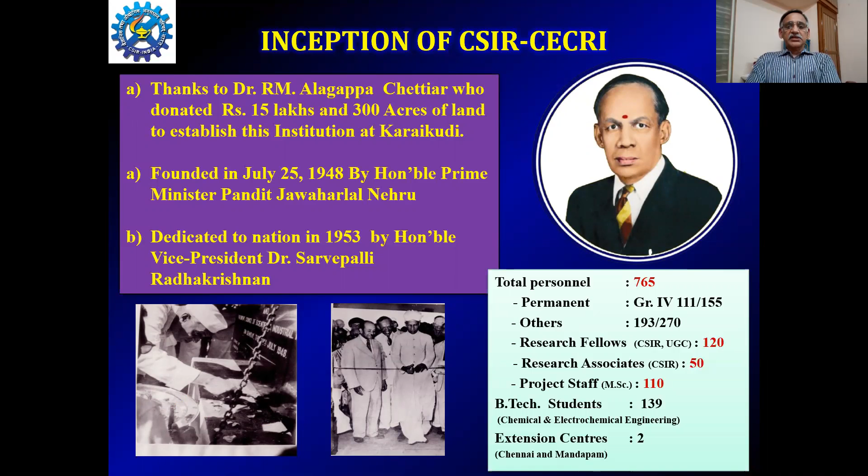CECRI also has a BTech program, unique of its nature called BTech in Chemical and Electrochemical Engineering, affiliated to Anna University, Chennai. And it has two extension centers, one at Mandapam, another at Chennai.

Devoted fully for electrochemical science and technology, CECRI has various core strengths: corrosion and material protection, electrochemical power systems, electrodics, electrocatalysis and bioelectrochemistry, electroplating and metal finishing, electroorganic and material electrochemistry, electrochemical process engineering.

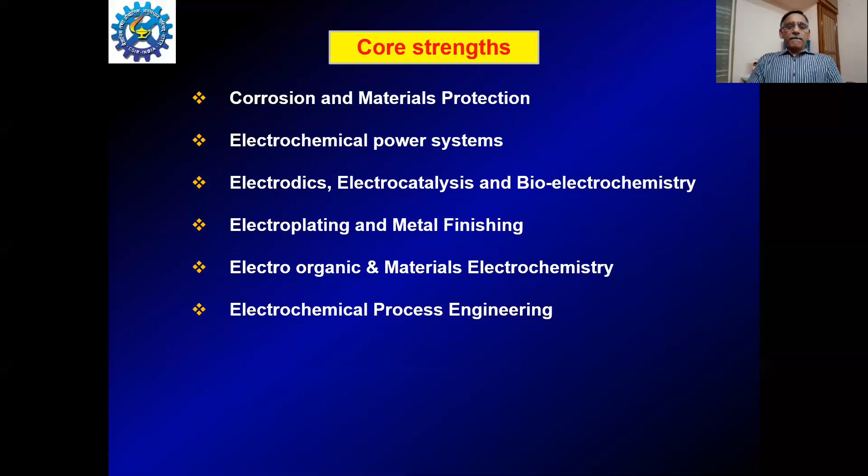Coming to the subject, corrosion and its control. What is corrosion? Why is it so important? Let me start my talk with the book definition of corrosion. Corrosion can be defined as the degradation of material due to its reaction with its environment.

This degradation may be the reduction in the useful properties of the material, or the weakening of the material due to thinning, and so on and so forth.

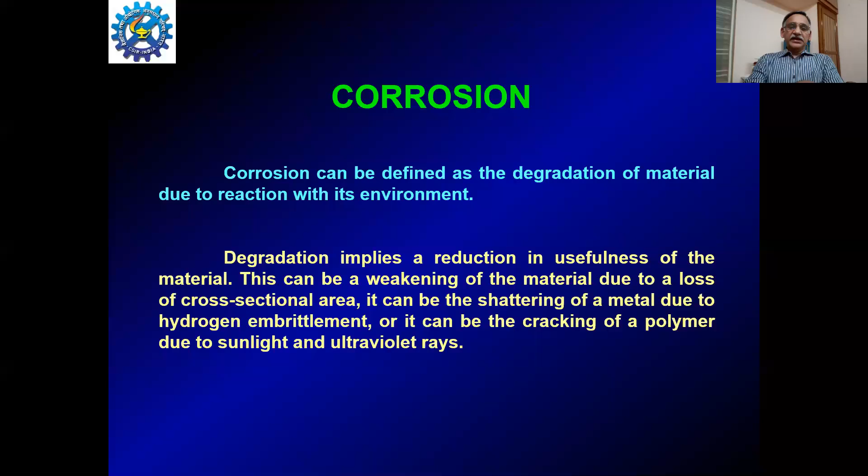Corrosion causes huge economic loss, not only to industries but also to households. For a nation, whether it is developed or under development, it amounts to around 3 to 5% of its GDP towards corrosion and its mitigation.

There are various losses which make corrosion so significant. It can be classified into two categories: direct losses and indirect losses. For example, the cost of materials lost due to corrosion comes under direct loss. The cost due to coatings and their application to mitigate corrosion comes under direct loss, and the use of corrosion inhibitors, or the cost of corrosion inhibitors, also comes under direct losses.

There are other indirect losses also. For example, if a company or an industry is forced to shut down due to a corrosion problem, then the production time lost and the product lost is also an indirect loss. Loss of product, probably leakage of some petroleum products, etc. in the petroleum industry, loss of efficiency.

For example, the loss of heat transfer efficiency of heat exchangers due to corrosion, contamination of food product. For example, if it is a food material manufacturing industry, such as infant foods and all, where the existence of corrosion at one point or another may also contaminate the product and it will become non-saleable.

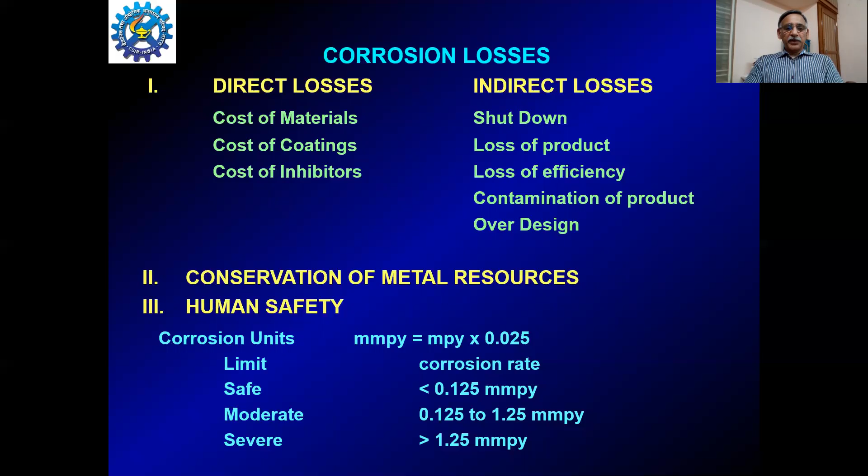Let me go into the little chemistry part of corrosion. For example, take magnesium metal. When magnesium is exposed to atmosphere or when it is immersed in water, it will have a reaction like this: Magnesium plus water plus oxygen gives magnesium hydroxide.

The delta G, that gives free energy for this reaction, is minus 1,42,600 calories. Take the example of gold. If a similar piece of gold is placed in water or kept in atmosphere, gold plus water molecule plus oxygen gives this hydroxide. The Gibbs free energy for this reaction is delta G is plus 15,700 calories.

Higher negative value of Gibbs free energy predicts that this reaction is more spontaneous, whereas the high positive value of this reaction says that it is not at all spontaneous.

So among the metals, there are some metals which can immediately react to the environment, and they are called active materials as far as corrosion is concerned. There are some metals like gold which will not react spontaneously with the environment, leading to corrosion, and hence they are called noble metals. Where from these metals are obtained?

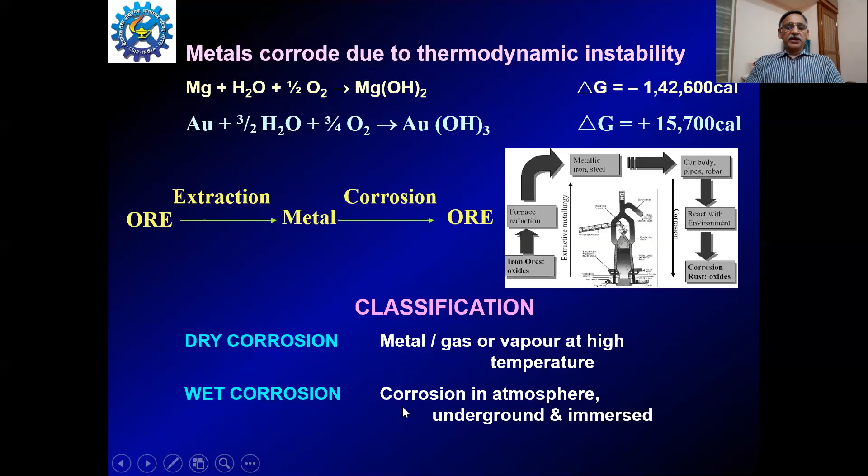We normally come across this wet corrosion, and we are going to see the chemistry part of wet corrosion in the coming slides. Let me take the example of zinc, which is a highly active material.

Zinc dissolves with hydrogen evolution. All chemistry students or chemistry faculties know this. When a piece of zinc is put in hydrochloric acid, in a beaker of hydrochloric acid, this is a reaction which will occur.

Zinc plus hydrochloric acid gives zinc chloride plus hydrogen. One atom of zinc metal reacts with two molecules of hydrogen chloride to form one molecule of zinc chloride plus one molecule of hydrogen gas. This is very spontaneous. Immediately when you put zinc into the hydrochloric acid beaker, this reaction will take place.

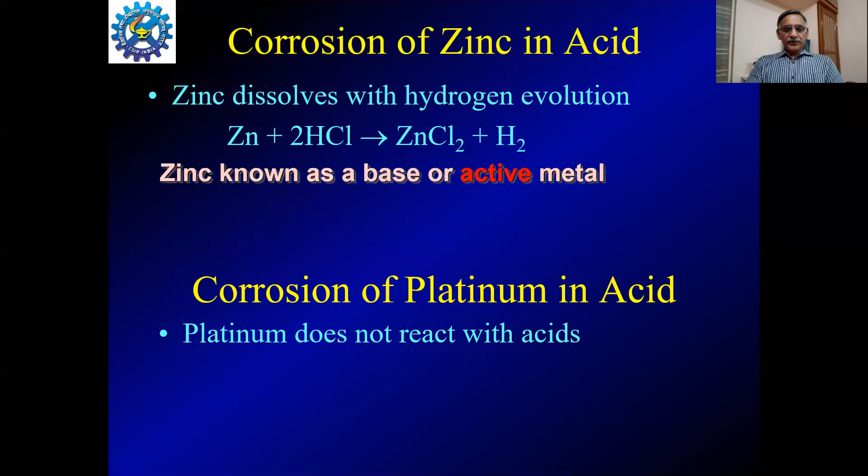So zinc is known as a base or active metal, as I already mentioned. Take the example of platinum. If you put platinum in the same acid, it does not react with the acid. And hence, as I already mentioned, platinum, like gold, will also come under the category of noble metal.

Let me explain the reactions involved in this process using a small cartoon. Take a small rod of zinc, and this is a small beaker containing hydrochloric acid. Immediately when you put zinc into it, we will have zinc dissolution and a lot of gas bubbles, this pink colored one, or hydrogen evolution that occurs on the surface of zinc.

Similarly, if you put a similar rod of platinum in the same hydrochloric acid beaker, nothing will happen because it is a noble metal. Here I have an ammeter just to indicate the current flow, and here the switch is open. So the reactions occur only on the zinc surface. We have zinc metal dissolution and also a vigorous gas evolution from the surface of zinc.

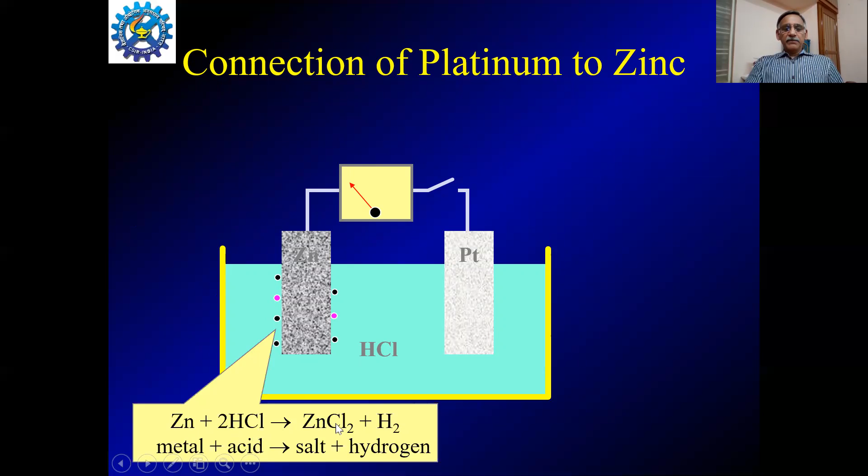Zinc and platinum are not connected, so there is no reaction on platinum. Now, the reaction, as I already introduced, zinc plus 2HCl gives zinc chloride plus hydrogen gas. Now I am connecting this switch.

Now the switch is connected, so the zinc is electrically connected to the platinum. What happens here? The zinc metal dissolution occurs on the zinc surface. You can see all the pink dots got transferred to the platinum surface because there is an electrical connectivity between these.

Notice that here the current also flows. When the switch is open, there is no flow of current. When the switch is connected, there is a flow of current. Zinc and platinum connected, current flows, and hydrogen is evolved on platinum. Here you can see only black dots, that is the metal dissolution on zinc surface, and the pink dots, that is the hydrogen gas evolution on the platinum surface.

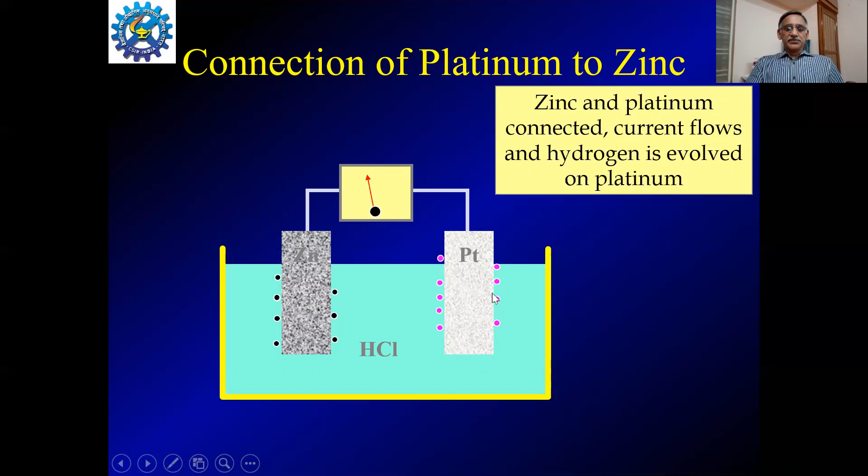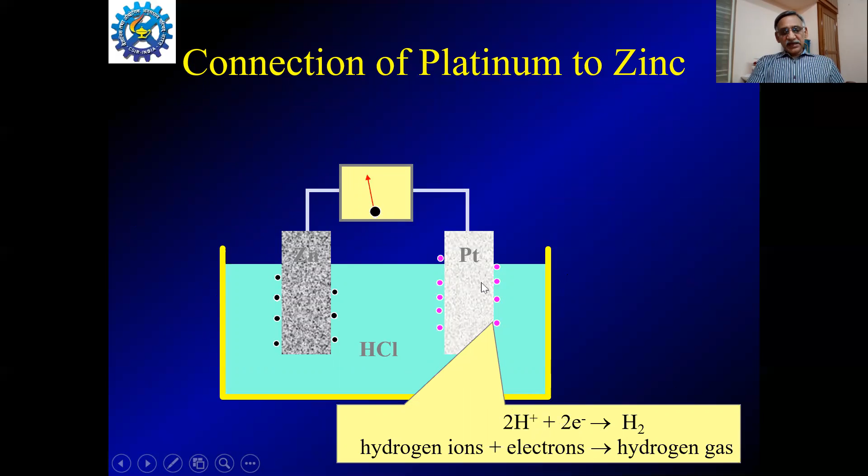Here what happens? 2H plus, the hydrogen ions available in the hydrochloric acid, plus the electrons which are available from the zinc dissolution, which are transported through this wire, reaches the platinum surface, reacts and forms hydrogen gas.

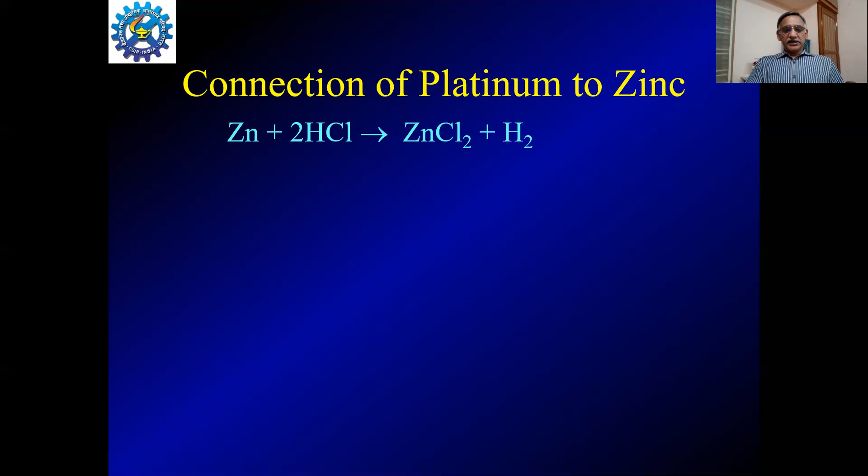The reaction occurring here is zinc dissolves into zinc 2 plus ions. These ions, black colored dots, leave the metal matrix and go into solution as zinc ions. These two electrons are liberated, and these electrons travel through the external wire to the platinum surface and get consumed. So when we connect zinc and platinum together in a hydrochloric acid trough, the original reaction, zinc plus 2HCl gives zinc chloride plus hydrogen gas, can be split into two reactions.

One is zinc gives zinc 2 plus ions plus 2 electrons. One atom of zinc metal dissolves and gets into solution as one zinc ion, which is into the solution, and 2 electrons on the metal surface.

And these 2 electrons get transferred to the platinum surface by the reaction, and there it will consume 2 hydrogen ions available in the acid near the surface of the platinum, combined with these 2 electrons which are liberated here and transported to the platinum surface and form hydrogen gas.

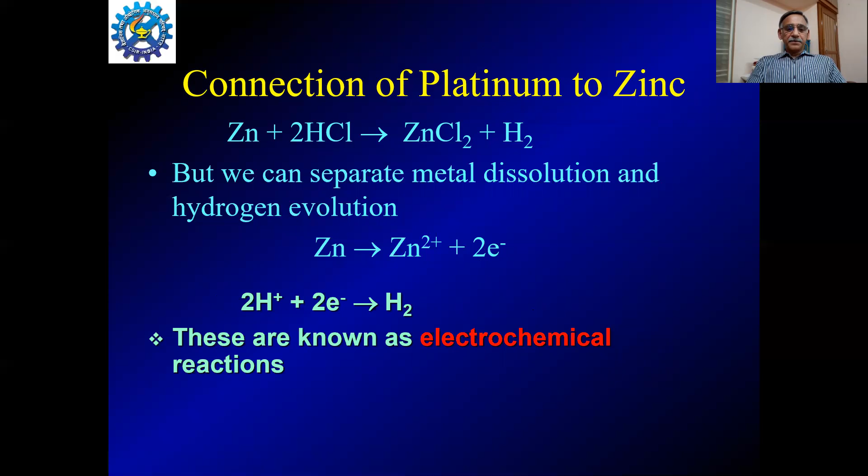These are known as electrochemical reactions. Why is it so? It is not only a chemical reaction, it involves the electrons also. So a chemical reaction involving electrons is termed an electrochemical reaction. Hence, the corrosion phenomena itself is an electrochemical reaction. So reactions that involve both chemical change and the transfer of charge are termed electrochemical reactions.

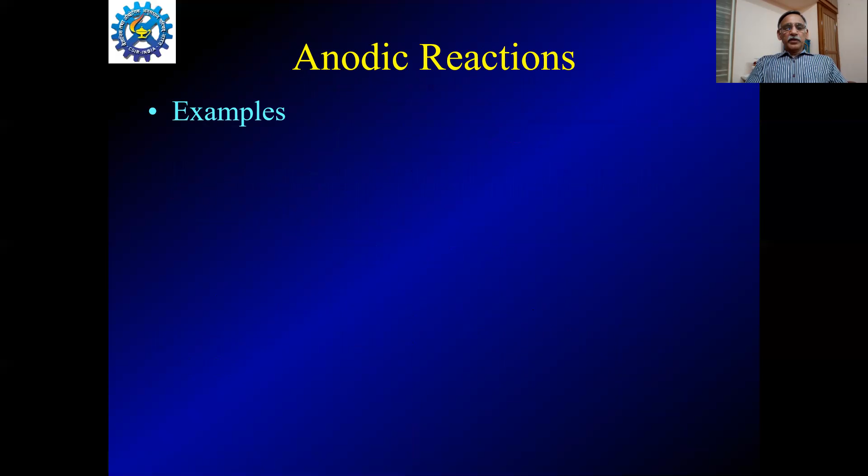So the various reactions, like the previous zinc gives zinc 2 plus 2 electrons, these are called anodic reactions. The various examples are zinc gives zinc 2 plus 2 electron, zinc corrosion. Iron gives Fe2 plus 2 electron, iron corrosion. Aluminum corrosion. And then ferrous ion further oxidation, etc.

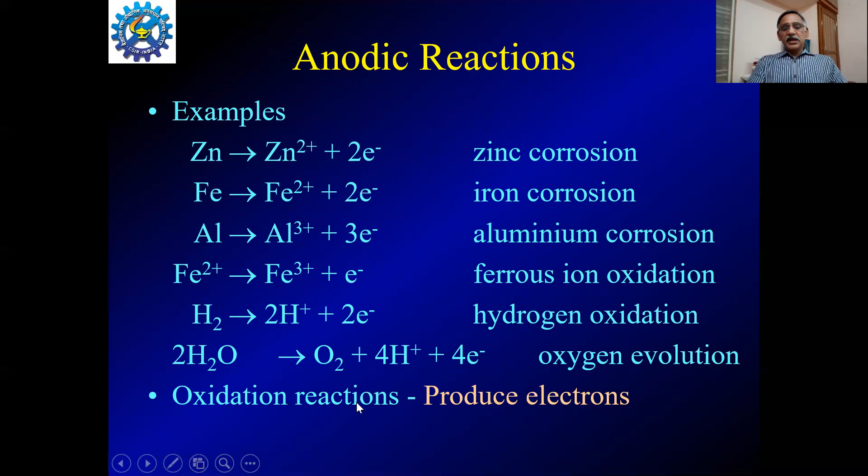In all these cases, the electrons are liberated, or these reactions produce electrons, and they are termed oxidation reactions, or otherwise called anodic reactions.

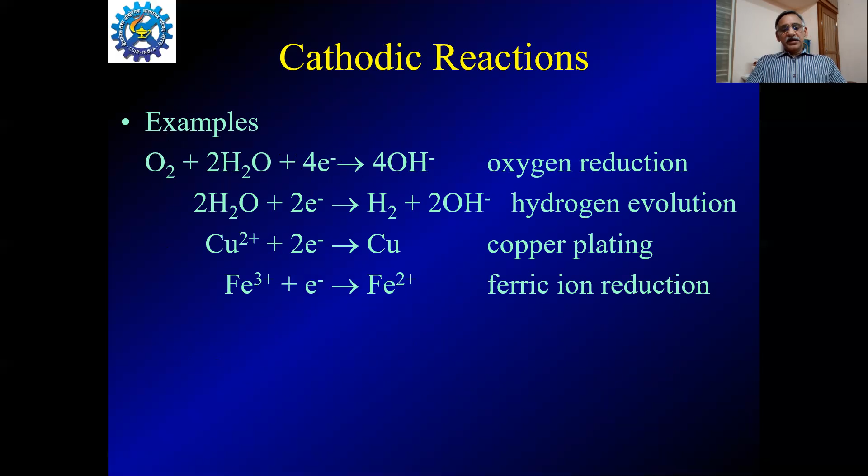Similarly, cathodic reactions are those which consume electrons. For example, the water molecule plus the dissolved oxygen plus the electron gives 4 OH. This is oxygen reduction, hydrogen evolution, copper plating, ferric ion reduction, and all. Here you can see all reactions consume electrons, and they are called reduction reactions or cathodic reactions.

So in a nutshell, if you take the case of iron in hydrochloric acid, similar to zinc, if you place a small nail in hydrochloric acid, you will have the reaction Fe plus 2 hydrochloric acid gives FeCl2 plus hydrogen gas. This can be split into 2 reactions as earlier.

Fe gives Fe2 plus 2 electrons, which is an anodic reaction or oxidation reaction. And another one is 2H plus 2 electron giving hydrogen gas. This is a cathodic reaction.

So what one should know is the corrosion reaction is an electrochemical phenomenon. This reaction itself is constituted by 2 complementary reactions. One is anodic reaction and another cathodic reaction. These 2 reactions occur simultaneously. So if you want to control corrosion, any one of the reactions should be stopped. For example, if one can stop this hydrogen gas evolution in the acid medium, then the corrosion will not proceed because charge neutrality has to be maintained.

Various examples for the other environments are: if it is atmospheric corrosion, the anodic reaction is metal dissolves, giving metal ions plus electrons, and ultimately it forms, with the available moisture, metal hydroxide. The cathodic reaction will be the oxygen and the water molecule or moisture plus these electrons gives hydroxyl ion formation.

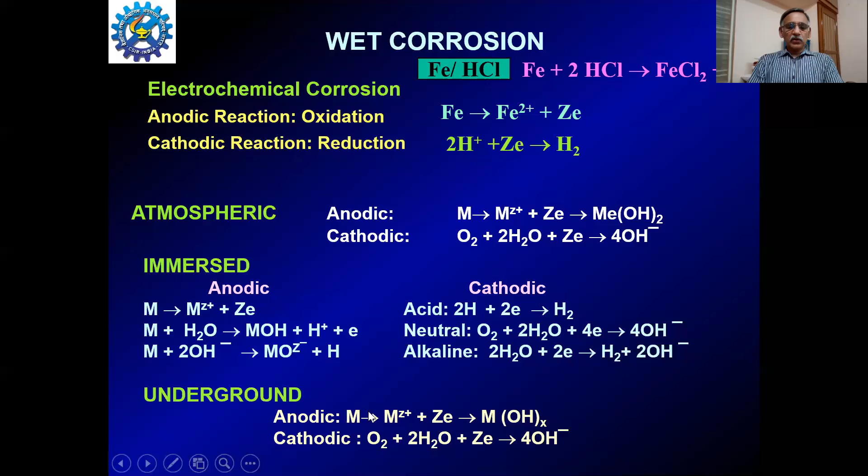Similarly, for the immersed condition, we have the metal dissolution as anodic, and if it is an acidic environment, the hydrogen ions available in the solution combine with the electron to form hydrogen gas. If it is neutral, the dissolved oxygen available in the water combines with the electron to form hydroxyl ions, and in alkaline, the water reacts with the electrons to form these kinds of hydroxyl ions. Similarly, for underground also, we have anodic and cathodic reactions.

Another better example which we will explain is, say for example, we have taken a beaker containing copper sulfate solution and then another beaker containing zinc sulfate solution.

Here we are putting a zinc rod and a copper rod, and connecting these two by an electrical wire, and the ions will be transported through a salt bridge like this. Zinc dissolves and goes into solution as zinc 2 plus ions, leaving behind 2 electrons, and these electrons get transported to copper.

On reaching the copper, there are plenty of Cu2 plus ions available in copper sulfate solution, and they combine together to form copper and get deposited over the surface. So after some time, the zinc rod dissolves or thins due to corrosion, whereas copper electrodeposition occurs and hence thickness increases.

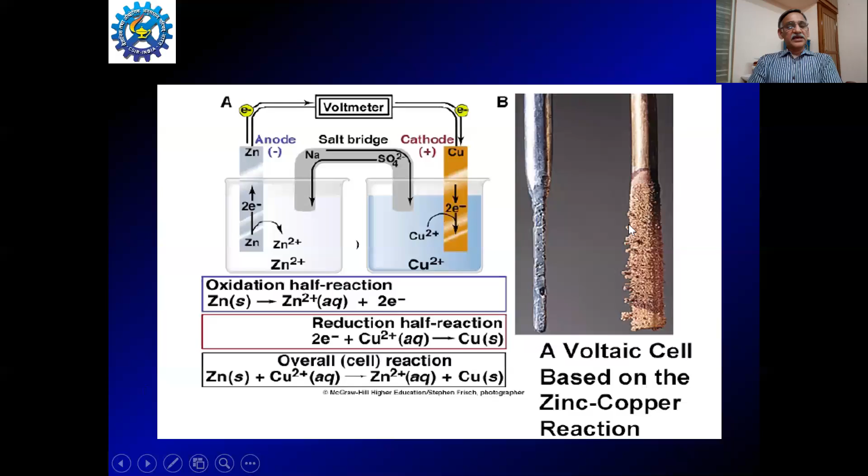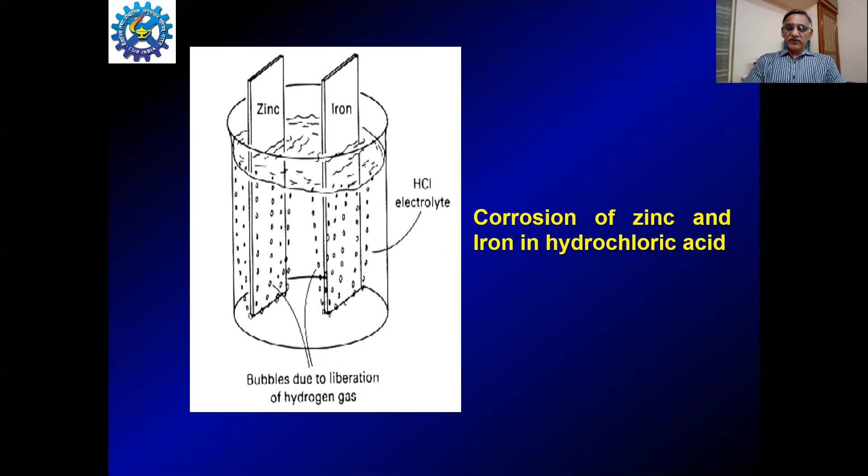If you take a beaker containing hydrochloric acid and put zinc in it, you can witness this vigorous corrosion reaction by enormous gas bubbles or hydrogen gas evolving from the surface of these metals.

How has this happened? Earlier I demonstrated that when we combine zinc and platinum, zinc is anodic or active metal, platinum is noble or cathodic metal. If we have only zinc or only iron, still corrosion occurs and there are plenty of gas bubbles or hydrogen evolution. This is because on a single metal surface, for example zinc, we have anodic sites and cathodic sites, which are very adjacent to each other.

At the anodic site, the metal dissolves and the electrons get transported to the cathodic site, where gas evolution occurs. So the same metal will have both anodic and cathodic sites, and accordingly it will have corrosion.

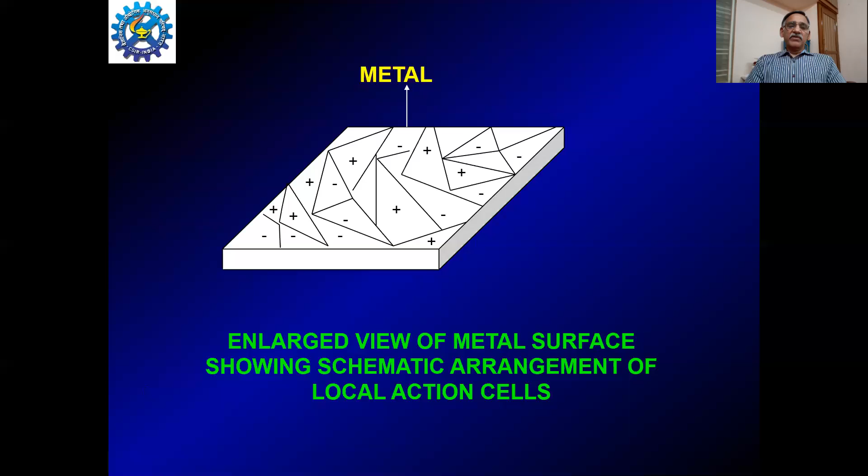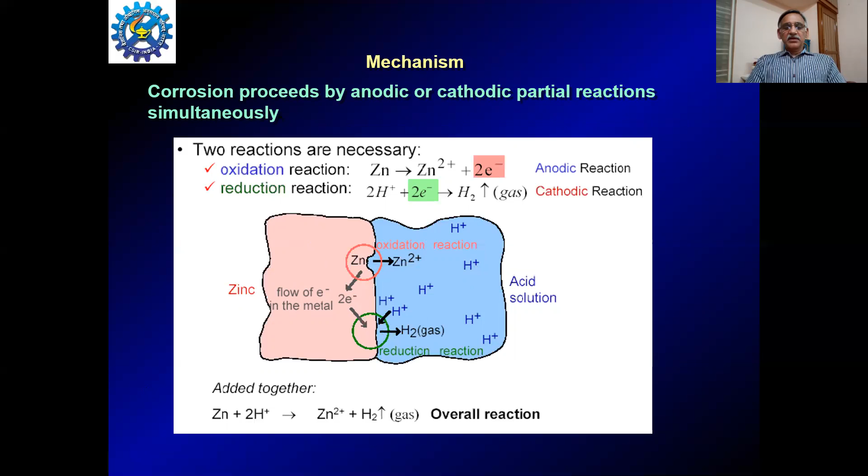In a nutshell, when zinc is immersed in hydrochloric acid, zinc metal dissolves or gets dissociated from the metallic matrix and goes into solution as zinc 2 plus ions. These electrons combine with hydrogen ions available in the hydrochloric acid to form H2 gas. This is the final version, or one can understand the corrosion phenomena this way.

Corrosion can be prevented by coating, inhibitors, cathodic or anodic protection, and designing for higher wall thickness, and so on. Let me introduce these things in the coming slides.

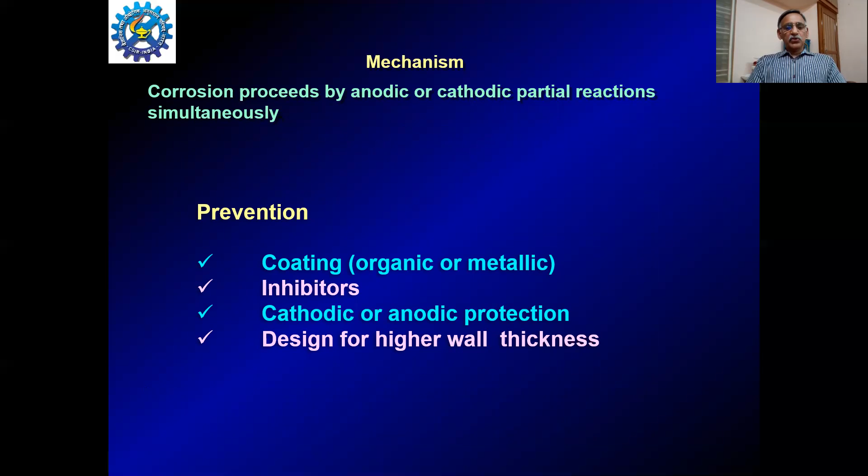There are various factors which influence corrosion. The composition of the material itself causes various anodic and cathodic sites available on the same material, whether it is a homogeneous single phase alloy -- the cold working, grain shape, grain size, and all decide where it is anodic and where it will be cathodic.

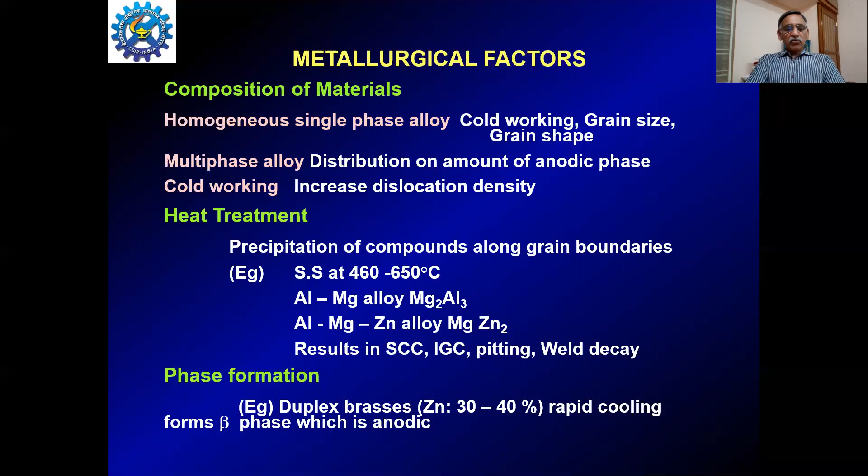If it is a multi-phase alloy, the distribution of the amount of anodic phase matters -- for example, aluminum copper alloy will have aluminum anodic areas and copper cathodic areas. Similarly, heat-treated alloys, for example stainless steel, will also form sensitive grain boundaries, and they will become anodic areas.

This dust settles over the surfaces and is hygroscopic in nature, retaining moisture. Because of this moisture retention, it also influences corrosion. So a lot of dust in an industrial atmosphere causes a lot of moisture retention and also influences corrosion.

When it retains moisture, the gaseous contaminants from nearby industries, which include carbon dioxide, H2S, or SO2, etc., or if it is a marine atmosphere, then we will have chloride ions -- these also get retained by the moisture or by the dust, and hence influence corrosion in a greater way.

When it is in immersion condition, the pH of the solution plays a major role. Also, the various dissolved gases like oxygen, carbon dioxide, H2S, or SO2, various dissolved salts, availability of bacteria, temperature, and velocity if it is a flowing medium -- these all decide or influence corrosion in a greater way.

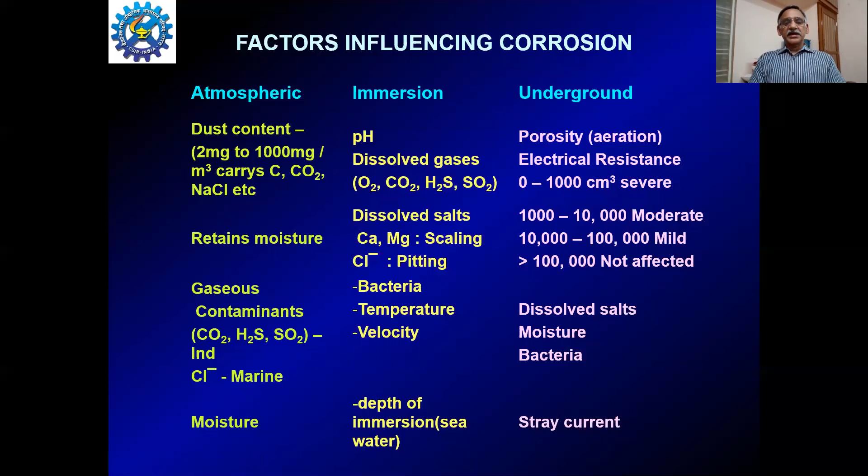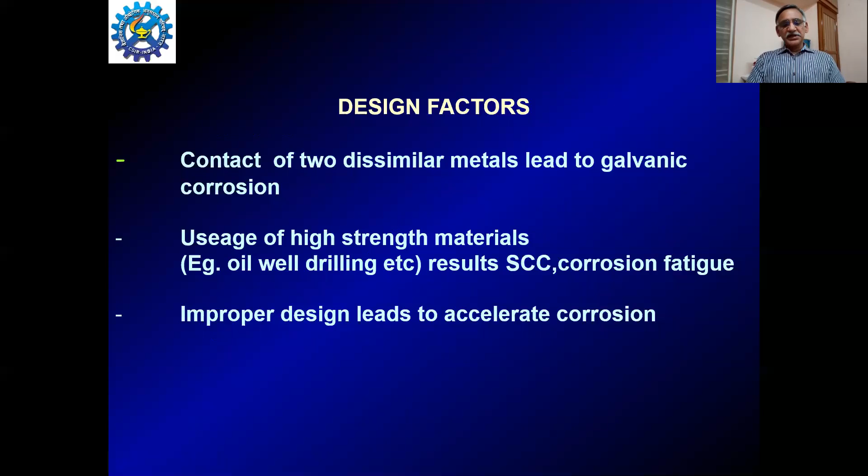Other parameters which influence corrosion are if we have two dissimilar metals which are connected or joined together, then it leads to a particular corrosion called galvanic corrosion. Let me explain it in the coming slide. Use of high strength materials also causes corrosion, as does improper design. These are all the various factors which influence corrosion.

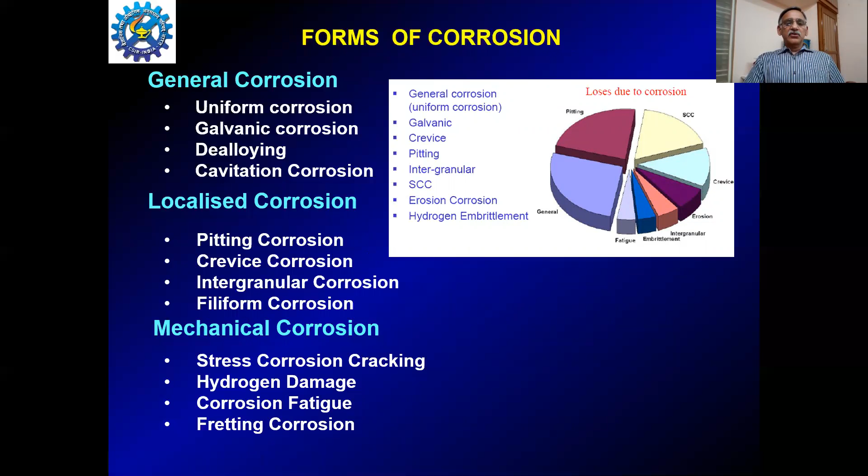Under general corrosion, we have uniform corrosion, galvanic corrosion, de-alloying, and cavitation corrosion. In localized corrosion, we have pitting, crevice, intergranular, filiform, etc. Under mechanical corrosion, we have stress corrosion cracking, hydrogen damage, corrosion fatigue, fretting corrosion, and so on. Let me give a small flavor about these forms of corrosion in the coming slides, because this itself is a big lecture to be delivered for 2 hours or so.

Uniform corrosion is a corrosion where the entire surface corrodes uniformly, due to the surface normal electrochemical reaction which causes rusting over the entire uniform surface. In one way, uniform corrosion is advantageous because the corrosion rate can be easily determined and corrosion can be easily controlled.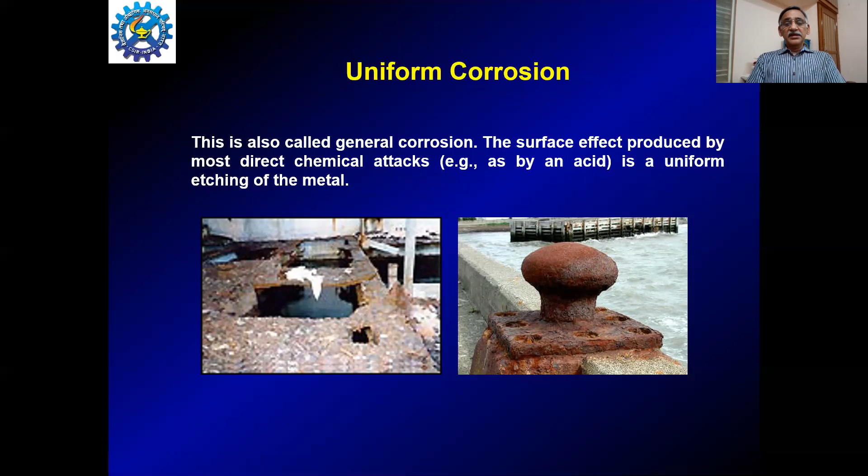Pitting corrosion is a localized corrosion where the corrosion occurs in microscopic defect areas on the metal surface, and they are very dangerous because they cannot be easily predicted, and the existence of pitting can be known only when leakage occurs.

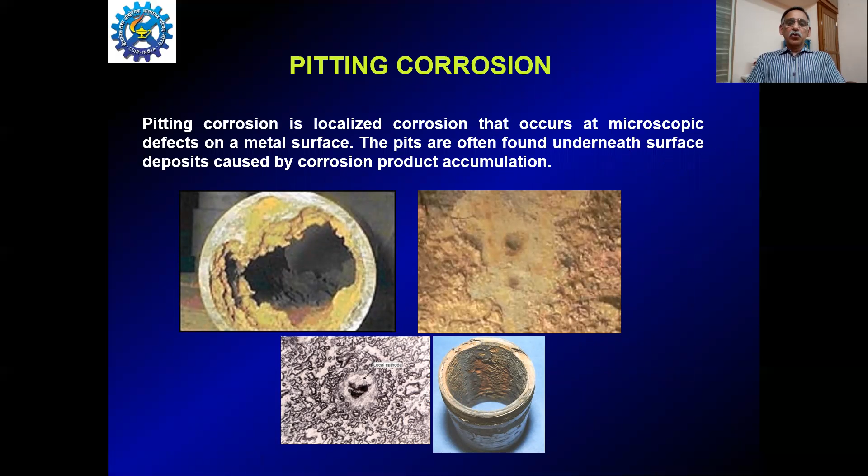Crevice corrosion: when two flanges are joined or pipe ends are joined, in between they normally use a gasket to avoid leakage. Under this shaded area, there will be a corrosion influenced by the stagnant electrolyte available in this area. This is called crevice corrosion.

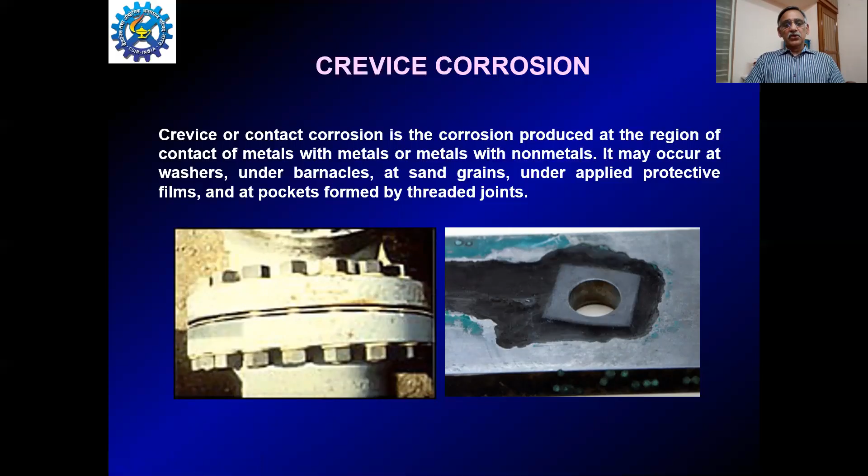Galvanic corrosion: when two dissimilar metals are connected, the active metal will corrode at a faster rate and a noble or passive metal will have no corrosion. For example, in the household, we might have seen a GI pipe with a brass or copper tap. Since brass is noble compared to GI, the GI corrodes. Similarly, if you have an aluminum sheet with a rivet, and the rivet is a different, noble metal, then the aluminum corrodes at a faster rate.

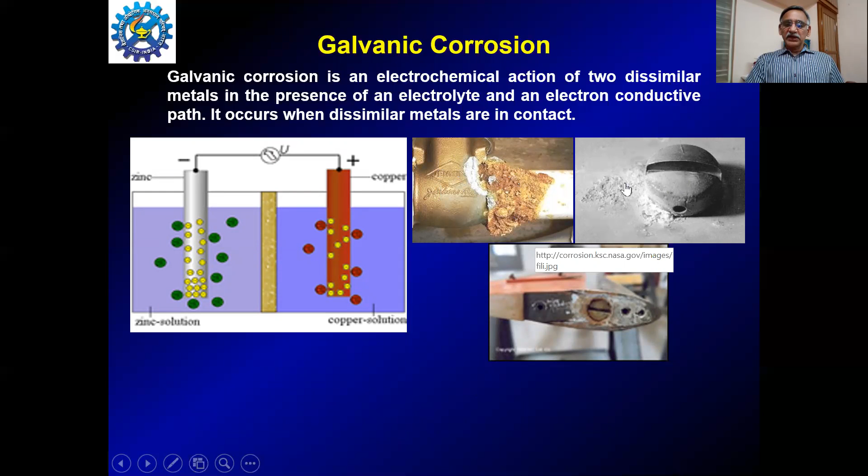Intergranular corrosion is a special form of corrosion which occurs through the grain boundaries. De-alloying is a certain type of corrosion under certain conditions. For example, brass, which is an alloy of zinc and copper—under certain conditions, the zinc alone leaves the metal matrix, leaving behind a copper-rich surface. This is called dezincification.

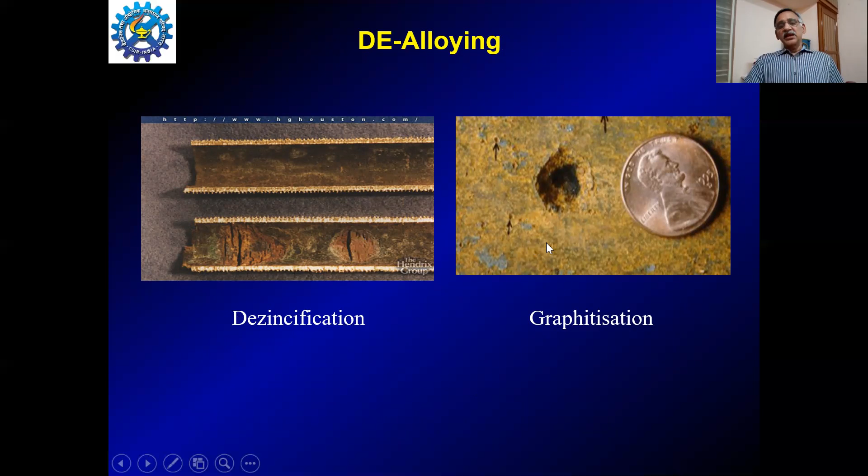This is a special type of de-alloying. Similarly, graphitization is where the iron leaves the surface, leaving behind a carbon-rich surface. Filiform corrosion is a corrosion which occurs beneath the film. Stress corrosion cracking is due to the coexistence of stress and a chemically corrosive environment.

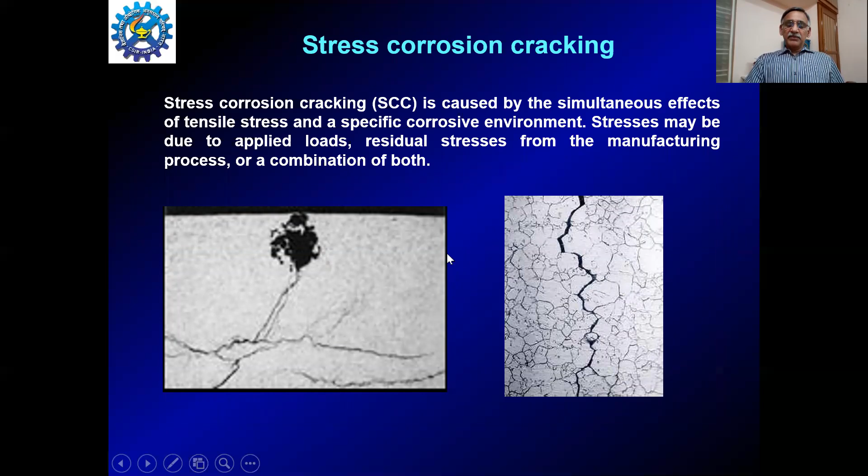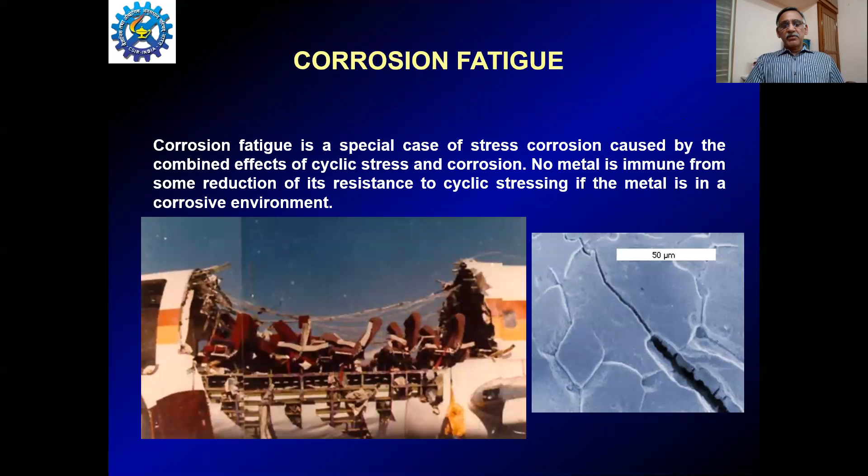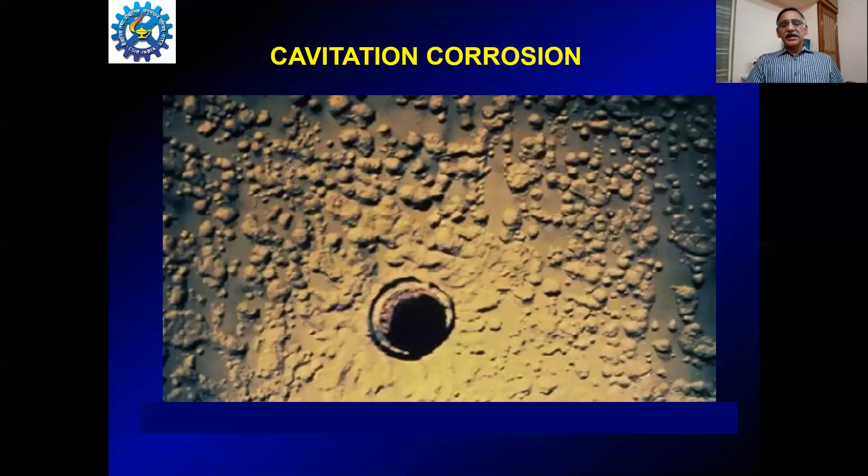Hydrogen blistering or hydrogen embrittlement is where hydrogen penetrates through the metal surface and results in blistering of the surface. Corrosion fatigue is a special form of stress corrosion cracking. Fretting corrosion occurs where a corrosive environment combines with simultaneous movement or rubbing of surfaces. Cavitation corrosion is where normal air bubbles occurring over the surface burst and create a lot of corrosion. So these are all the various forms of corrosion.

After giving a flavor of the various forms of corrosion, let me take you a little deeper into the thermodynamics part of corrosion.

Many have heard about the EMF series, standard electromotive force series. It is nothing but an arrangement of metals based on their standard reduction potential. In arranging these metals, the hydrogen reduction potential is assumed as 0. With reference to hydrogen, all the metals' potentials were measured in their own ionic environment.

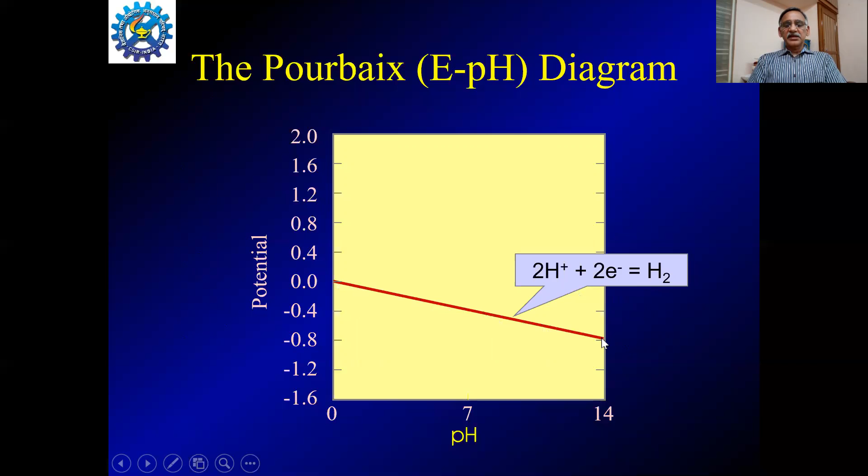For example, this red line represents the hydrogen equilibrium: 2H+ + 2 electrons gives hydrogen gas. As seen in the EMF series, its potential starts from 0, so this line represents the hydrogen equilibrium line. Below this line, hydrogen is stable in gas form, whereas above it, water is stable under various pH and potential conditions.

Similarly, the oxygen reduction line is 2H2O gives O2 plus 4H+ plus 4 electrons. This is represented by the green line starting from around 1.3. Above this green line, O2 is stable. In between the red and green lines, water will be stable as water molecule. If we cross the green line, oxygen is stable in gas form, and if we go below the red line, hydrogen is stable again in gaseous form.

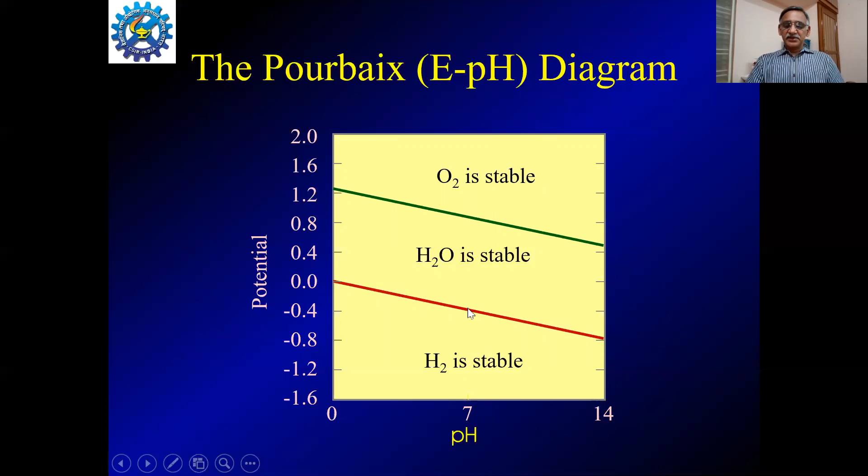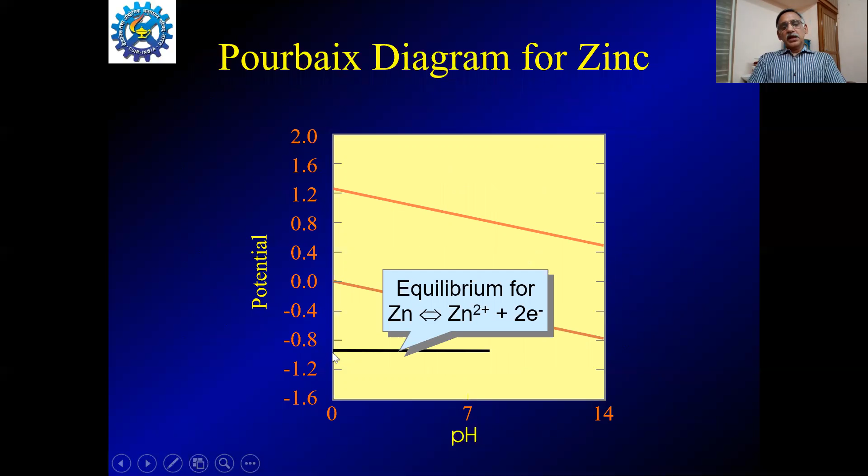Now let us take the very same example of zinc corrosion. This line represents the equilibrium of zinc giving zinc 2+ plus 2 electrons. Its EMF potential is around minus 0.9, and this line represents this equilibrium, meaning zinc metal is stable below this line, and zinc ion above it.

This is the equilibrium between zinc metal and zinc ion, so this line is the boundary between these two species. Above this boundary, zinc 2+ is stable. Below this line, zinc metal is stable.

This line represents the equilibrium of zinc 2+ plus 2OH minus. Because we're going to higher pH values, we'll have more hydroxyl ions, so zinc ion plus 2OH gives zinc hydroxide. This vertical line is the boundary between zinc ion and zinc hydroxide. We've already mentioned that zinc 2+ is stable here.

This clearly shows that on the left side of this line, zinc ion is stable, and on the right side, zinc hydroxide is stable in solid form. This crossed line represents zinc plus hydroxyl ion giving zinc hydroxide.

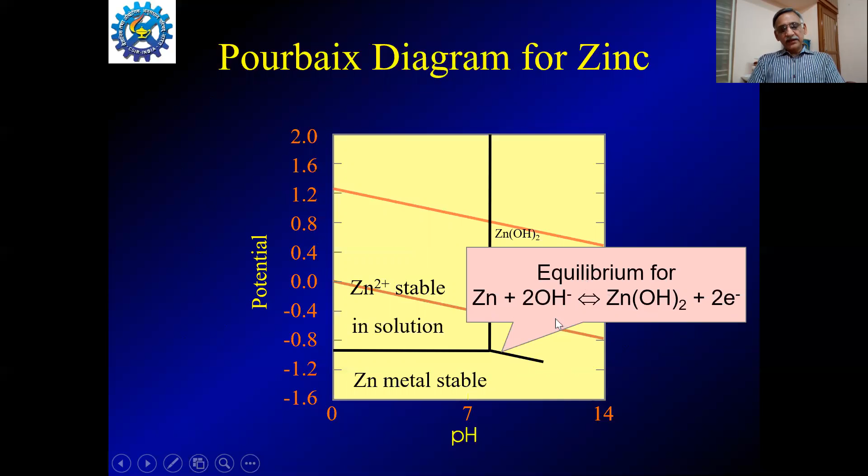Here you can see it is again the equilibrium between zinc metal and zinc hydroxide with the available hydroxyl ions. As you can clearly see, only this small domain is where zinc hydroxide is stable. It is sure that below this line, zinc metal is stable.

This line represents the equilibrium between zinc hydroxide and further zinc O2 minus ion. This vertical line is the boundary between zinc hydroxide and this species, with increased availability of hydroxyl ions. On the left hand side, zinc hydroxide is stable; on the right hand side, zinc O2 minus ion is available, stable in solution.

The final line is: zinc, with very high concentration of hydroxyl ion availability, may get transformed into zinc O2 minus plus water plus electron. So this line gives the boundary between zinc metal and zinc O2 minus. Since zinc O2 minus is already available here, this is an equilibrium between these two species.

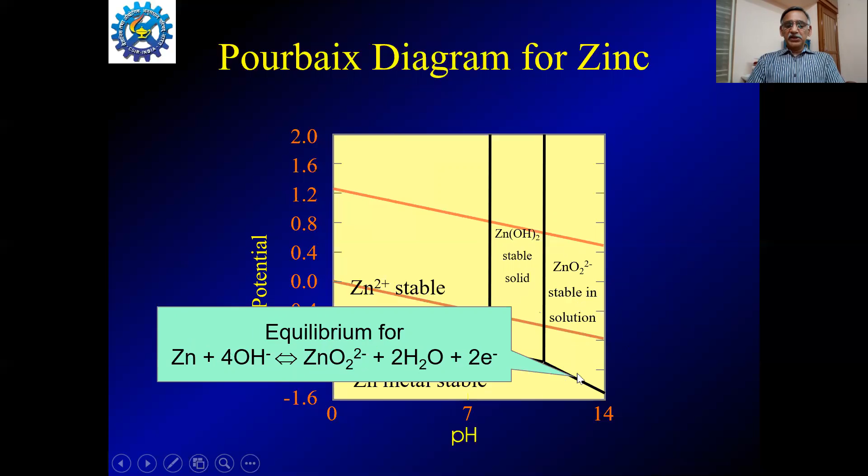Here we have seen, under various potential and pH conditions, below this line, zinc metal is stable. This very big area, bounded by these two lines, is where zinc 2+ ion is stable under various potentials and pHs. Going to higher pH, under these various potentials, zinc hydroxide is stable for a short area, and then it gets transformed to zinc O2 minus.

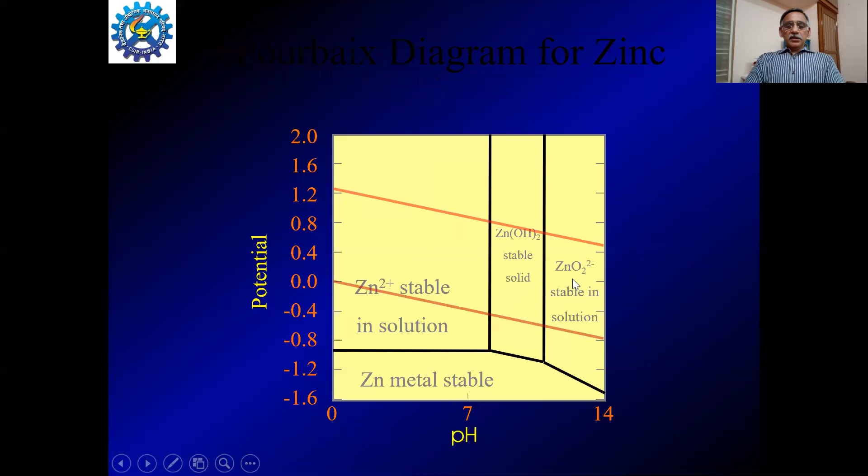Now, the area where zinc metal is stable is called the immune domain or immunity domain. Under these potential and pH ranges, if we have zinc, it will be stable and will not undergo corrosion at all. That means zinc is immune to corrosion.

The area where zinc is available in ionic form, here and here, is called the corrosion domain. It is because corrosion occurs in these big areas of huge potential range and pH that zinc exists in the form of ions, and hence they are called corrosion domain or corrosion region.

A small narrow region where zinc hydroxide in solid form is stable is called passive. Here there will be an initial corrosion so that the zinc metal gets transformed to zinc hydroxide, but it will cover the zinc surface and form a film, and hence the metal will become passive.

As you can see, the entire potential-pH region can be classified into three domains: immune domain, corrosion domain, and passive domain. The metal, in this case zinc, if maintained in these potential-pH conditions, will not corrode at all—it is under immune condition. This is normally called cathodic protection.

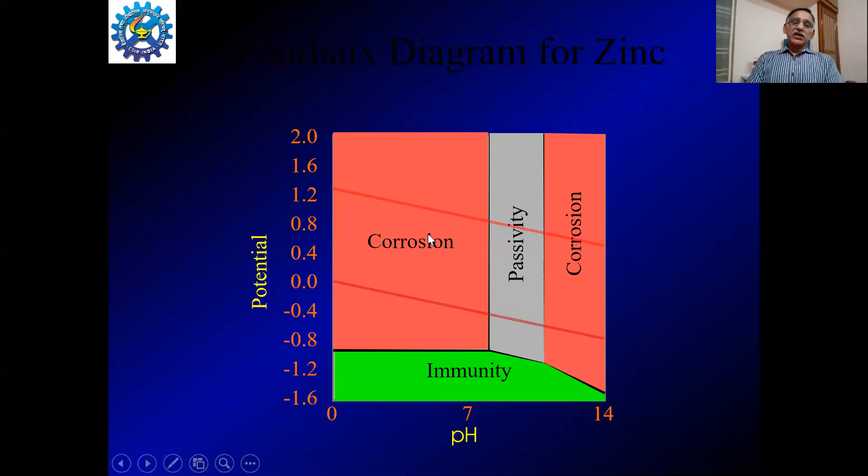By bringing the potential of the zinc to a negative value under various pH conditions, we bring zinc into the immune domain. If zinc is in the big red domain, it will naturally corrode since it is thermodynamically favorable. But if you manipulate the potential so zinc stays in this small domain, there will be initial corrosion, but zinc hydroxide forms over the surface, protecting the metal, and further corrosion is stopped.

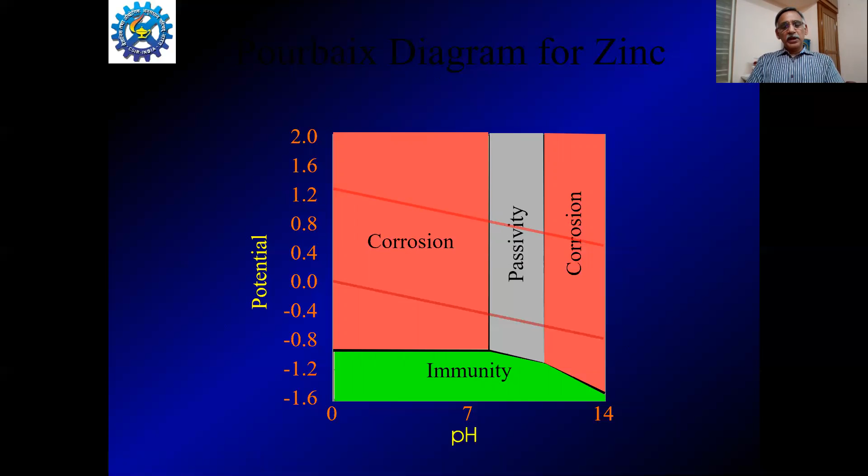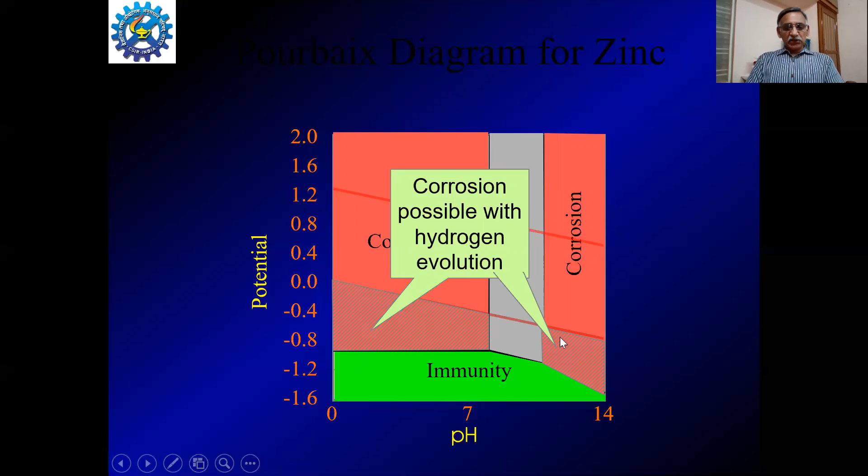Corrosion is thermodynamically impossible in the immune domain. Corrosion is possible but likely to be stifled by solid corrosion product. Recall this slanting line is the hydrogen equilibrium line. Below that, in these red zones, corrosion will be possible with hydrogen evolution as the cathodic reaction, and here, oxygen reduction. Under these high positive potentials, corrosion requires strong oxidizing agents.

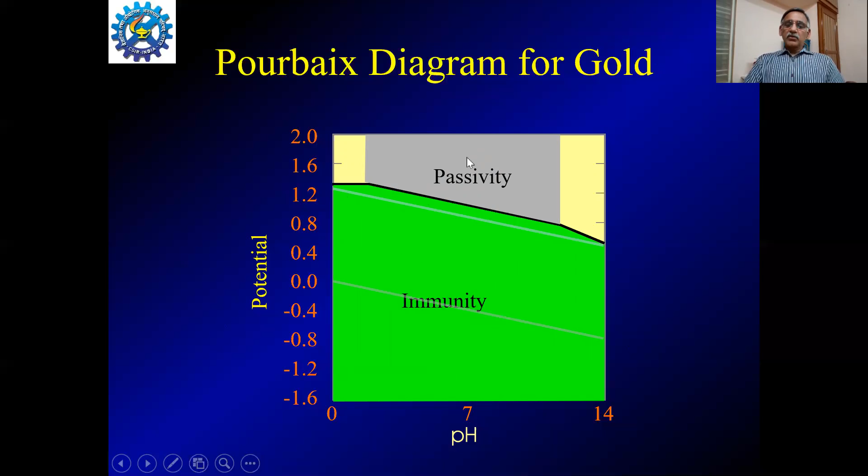Similarly, let us take the example of gold. Here is the hydrogen equilibrium line and the oxygen equilibrium line. Gold has a very big immune domain, which is why gold does not corrode under various potential or pH ranges. Normally, day to day, if gold is kept in any of these areas, it will be immune, and it also has a very big passivity domain. There are gold also corrode under specific conditions of potential and pH where it will also corrode.

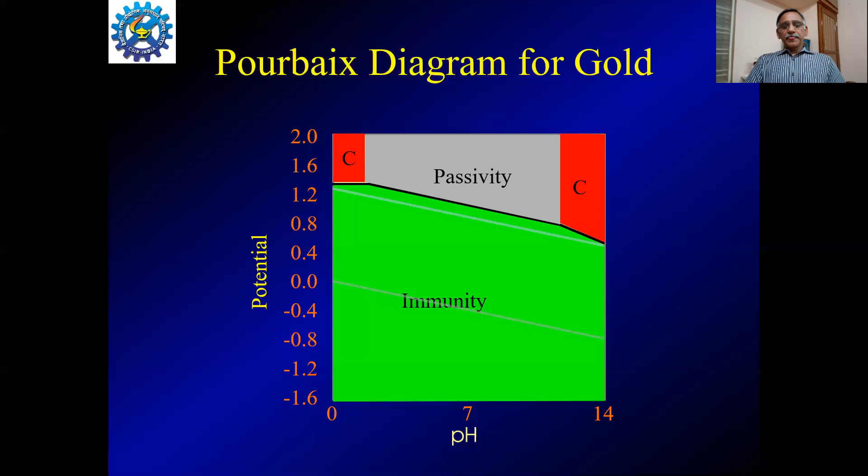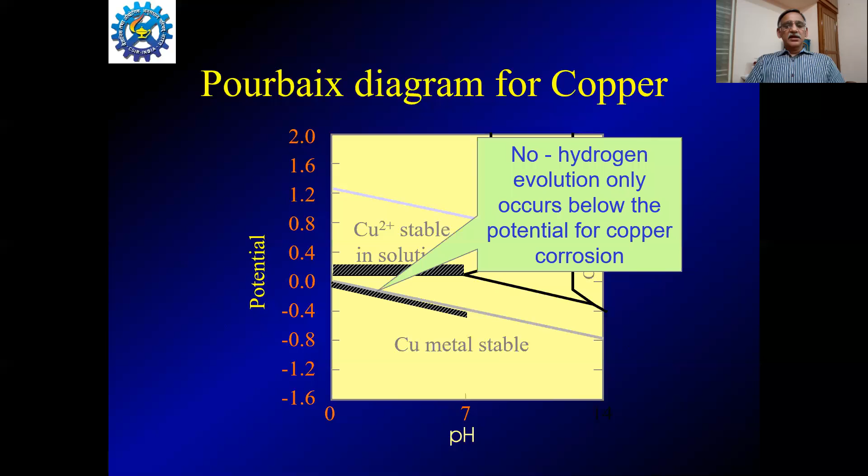Similarly for copper, we have the copper potential-pH diagram: copper metal stable, copper 2+ stable, copper oxides, and here you can see this is the immune domain, this is corrosion, this is also corrosion, and this is a passive domain. Will copper corrode in acid? No, because the hydrogen line is well within the immune domain, so hydrogen evolution only occurs below the potential of copper corrosion, hence copper will not corrode in acid pHs. Will it corrode in neutral? Usually it will just passivate, but corrosion can occur in slightly acidic solutions.

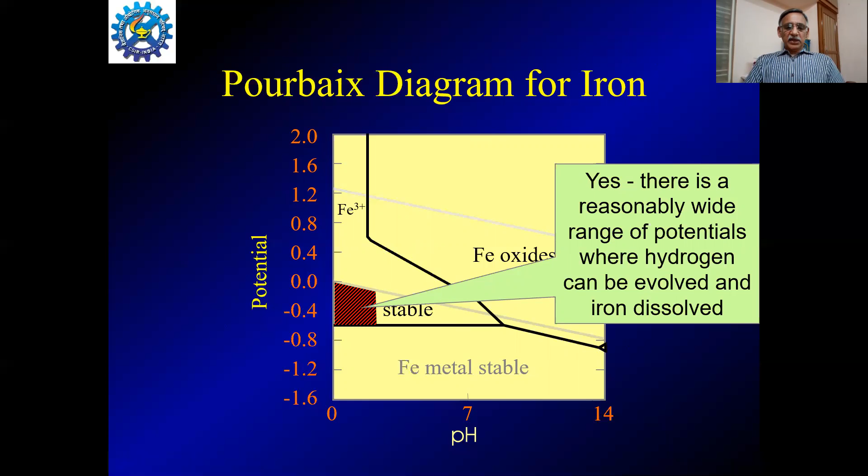Similarly for iron, we have this iron immune domain, this is the corrosion domain, and this is a big passive domain. Will iron corrode in acid? Yes, here we have the corrosion domain and the hydrogen line is also there, so by hydrogen evolution, normally it corrodes. Will it corrode in neutral? Yes, in neutral also, by oxygen reduction, it will corrode. In alkaline, no - iron forms a solid oxide over the surface and hence gets passivated. This potential pH diagram is a very good tool to examine the various domains, whether the metal will get protected, is totally free of corrosion, or will undergo corrosion.

Having covered all these thermodynamic parameters, namely the standard EMF series, then galvanic series, and finally the potential pH diagram - all these are thermodynamic parameters. Please mind, they don't have any kinetic information. That is, they will never tell the rate of corrosion. They only predict whether corrosion is possible or not. How fast the corrosion will occur cannot be obtained from this thermodynamic data.

The kinetic parameters can be obtained from corrosion monitoring methodologies. Corrosion monitoring, as said earlier, corrosion rate can be determined either in millimeters per year or mils per year. There are plenty of methods available to estimate the rate of corrosion. In general, it can be classified into three categories: non-electrochemical methods, electrochemical methods, and NDT methods. Non-electrochemical method means, as the name implies, we have nothing to do electrochemically with the corroding metal, and well-known examples are weight loss or gravimetric method, electrical resistance method, chemical analysis, etc.

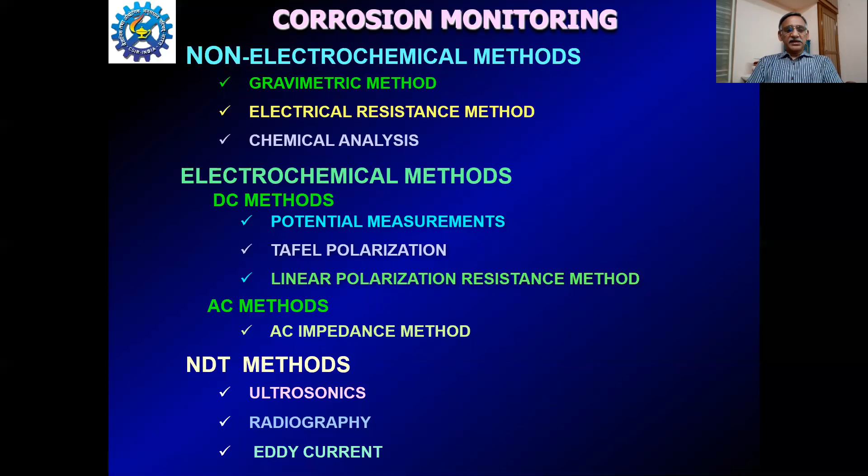Having covered various forms of corrosion, thermodynamic aspects of corrosion, and finally the rates of corrosion and how we can determine them by various means, let me in this final spell cover some information about the various corrosion control methods.

Given the importance of corrosion, its complexity, and the economic losses it brings, one has to seriously think about corrosion control methods. It is not a simple thought that we can simply live with corrosion. That may apply to simple cases like household pipes, but imagine huge pipelines carrying petroleum products or flammable gases, where

we badly need some corrosion control methods. These can be broadly classified into 4 categories. Number 1 is modification of metal. As the name implies, a metal which is corrosive can be converted into another alloy by adding small elements. For example, steel which is highly corrosive in acidic, neutral, or alkaline environments can be made corrosion-free by alloying small amounts of chromium and nickel to get stainless steel. This is an example of alloying.

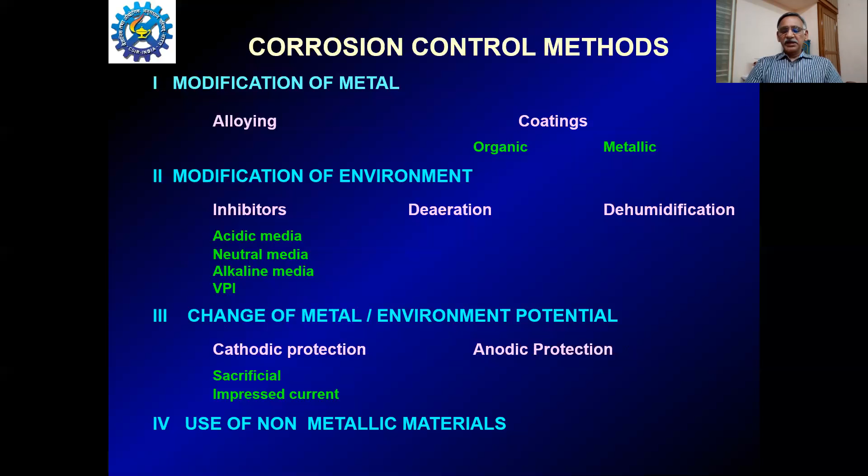Finally, the fourth category is use of non-metallic materials. For example, instead of GI pipes, one can use PVC pipes. Similarly, instead of steel sheets, we can use PVC sheets, and so on. These non-metallic materials will not have any corrosion, and hence we can avoid the corrosion issue altogether.

Cathodic protection is a very big engineering phenomenon, so let me give a small hint about what it is: the artificial conversion of the metal to be protected into a cathode. Recall that in the potential-pH diagram, there is a domain called the immune domain at the bottom. If the metal's potential is shifted by external means, using a rectifier or current supply, to the cathodic or immune domain, the metal gets protected.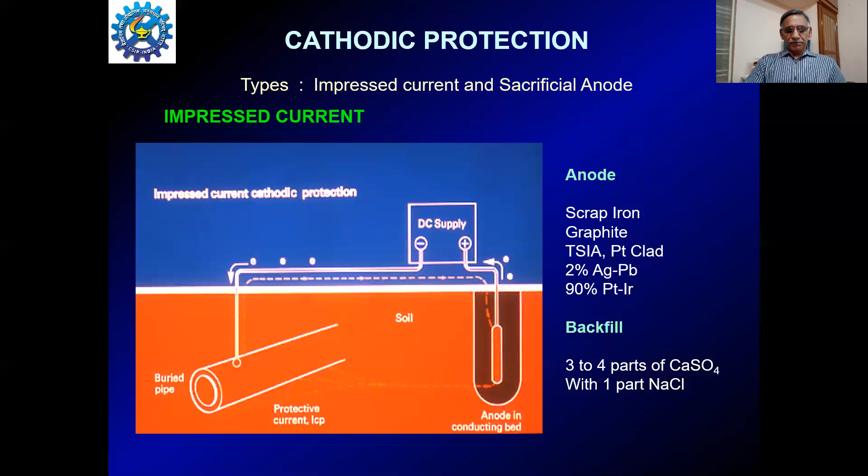The other method is sacrificial anode. Recall that some metals are active and some are noble. Suppose we want to protect a steel oil platform offshore, which normally has high corrosion due to the corrosivity of seawater. If we attach a piece of zinc, magnesium, or aluminium to the steel structure, then as in galvanic corrosion, zinc being highly active compared to steel sacrifices its life—it dissolves into zinc ions, releasing electrons which flow to the steel. Because it sacrifices its life to protect the steel, it is called a sacrificial anode, and the zinc undergoes corrosion to give protection to the steel structure.

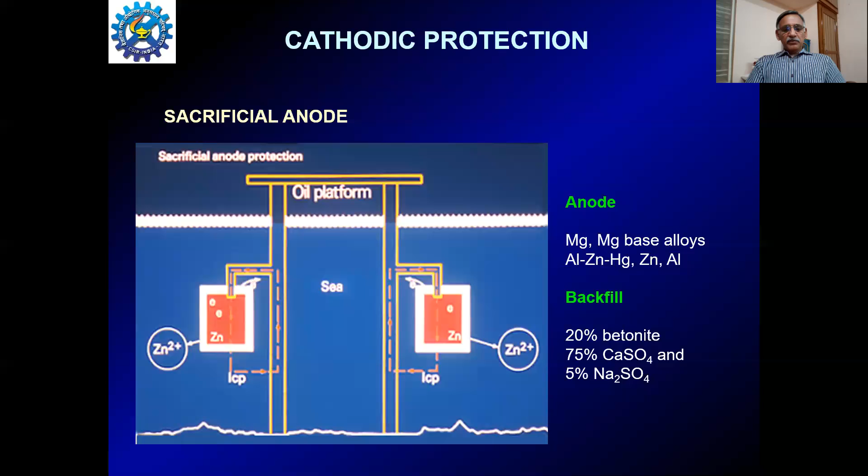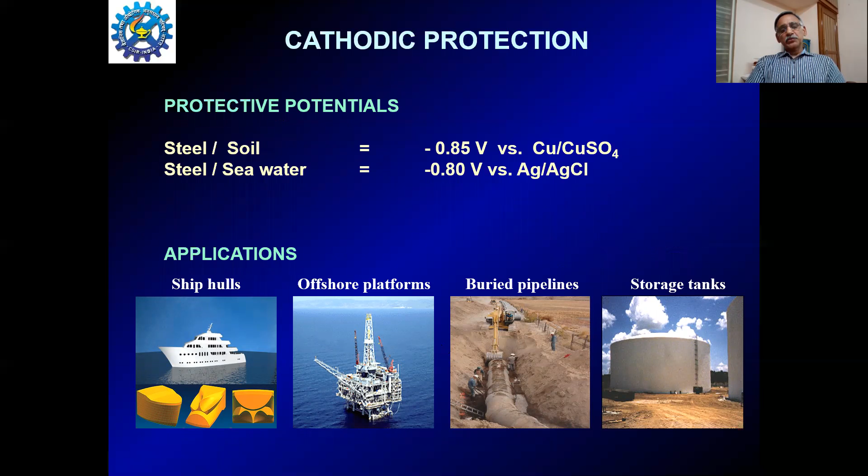This is why you might have seen zinc-coated steel sheets used for industrial roofs, called galvanized sheets. Similarly, galvanized iron pipes are also used; the zinc sacrifices its life to give protection to the steel sheet or pipe. This finds application in ship hulls, offshore platforms, buried pipelines, or storage tanks—areas where we can have cathodic protection either by sacrificial protection or the impressed current method.

Coming to corrosion inhibitors, as already mentioned, these are chemical substances added in small quantities to the environment so that corrosion is controlled or minimized. Depending on the environment, many compounds are used. For example, in acidic media, mostly organic compounds like amines, azoles, unsaturated alcohols, and aldehydes are added in small quantities, and they either reduce the rate of anodic or cathodic reaction, or in some cases form a film over the surface to prevent corrosion.

In a neutral medium, mostly inorganic compounds like polyphosphate, phosphate, zinc, benzoate, and nitrite are used. In an alkaline medium, for example a concrete structure, mostly nitrite, monofluorophosphate, or citrate are well-known inhibitors. While making the concrete itself, a small quantity of nitrite is dissolved in water and mixed with the concrete ingredients, and if present in the concrete, it gives inhibition to the reinforcement rods inside.

Vapor phase inhibitors are used to protect metals during storage and transport. Dicyclohexyl ammonium nitrite is coated on papers, and these papers are wrapped around metal surfaces during transportation.

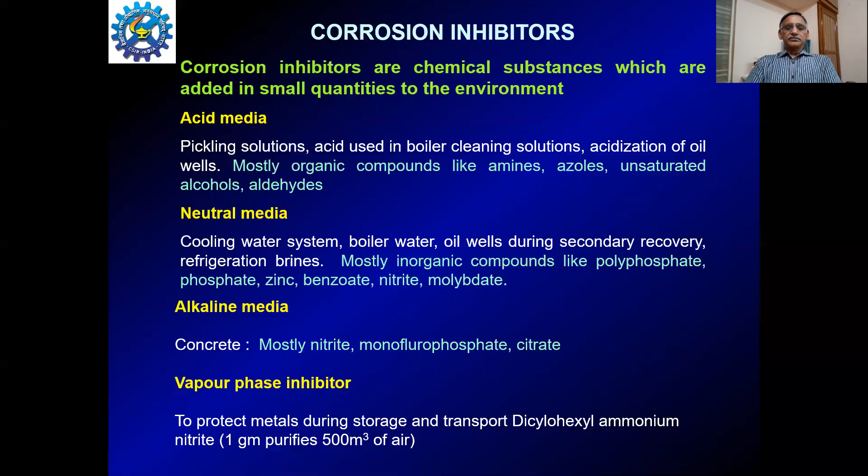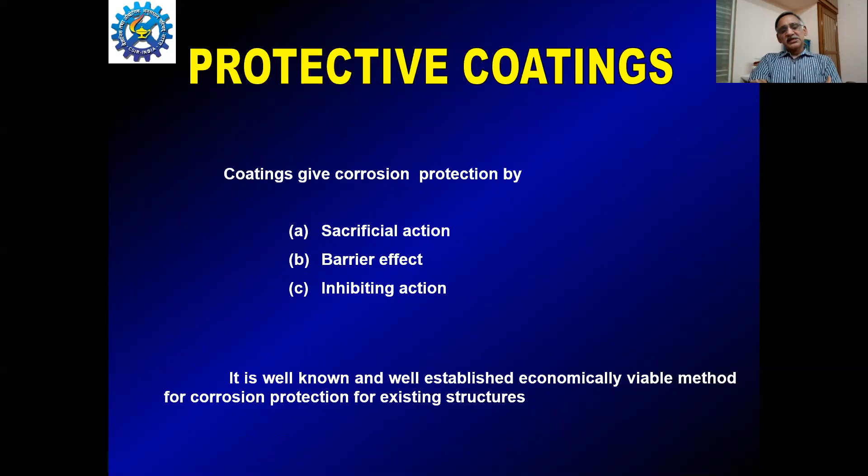Coming to protective coatings, coatings can give protection against corrosion in three ways: sacrificial action, barrier effect, and inhibiting effect. Sacrificial action is like zinc, magnesium, or aluminium coating—if you have a zinc coating over a steel sheet, the zinc sacrifices its life and gives protection to the steel. Barrier effect, as mentioned, is similar to using a blanket in winter—it simply isolates the active metal from the corrosive environment, stopping corrosion. In inhibiting action, some inhibitive ions mentioned earlier can be added as an ingredient in the coating, preventing corrosion.

Normally we apply black or white paint to window grills or doors, but these are not for corrosion purposes. Corrosion protective coatings are entirely different and are usually applied in 3 or 4 layers. The first layer over the metal surface is called the primer, whose prime function is to adhere to the metallic surface and provide adhesion for subsequent coats. There is an intermediate coat with huge thickness where moisture and ionic transport are blocked. The top coat gives resistance to the atmosphere—for example, if the metal is exposed to sunlight, the coating must withstand UV rays.

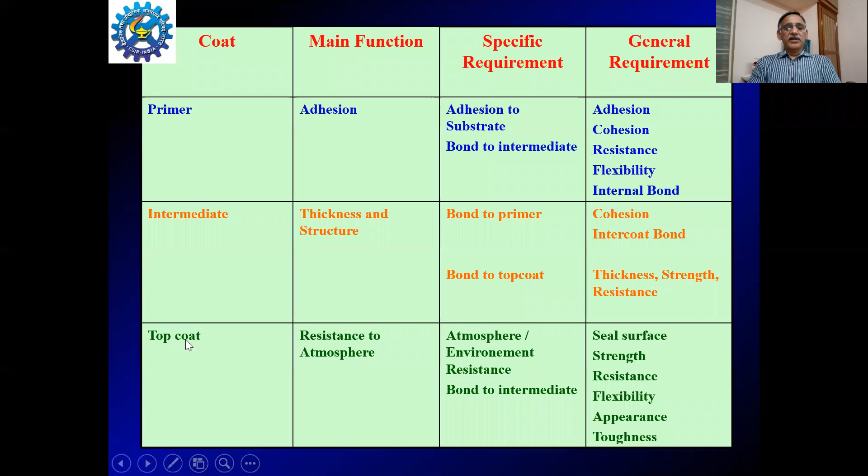If it is immersed, then this layer should have a protective mechanism. This slide clearly explains how. This is a steel structure, and primer is the one which is applied immediately over the surface.

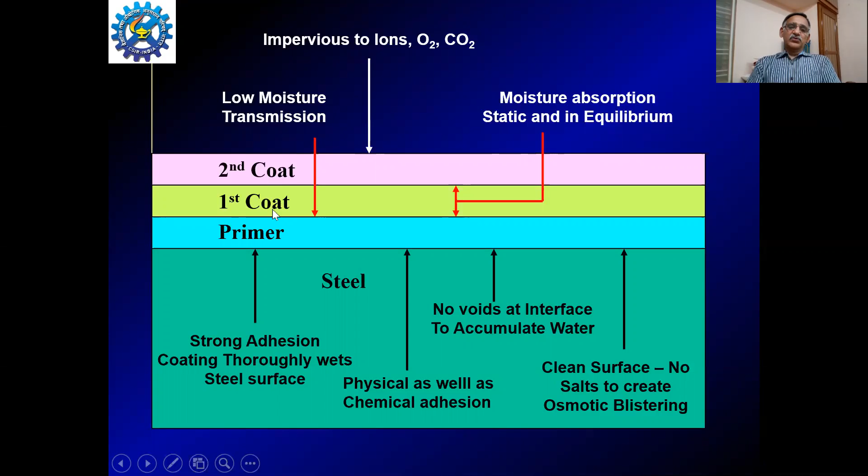As I already mentioned, it is this area where we add more corrosion inhibitors as pigments, and the success of the entire coating structure depends upon how successful the primer is. It should give good anchorage to the surface, and also good attachment to the subsequent coats. First coat and second coat are the other subsequent coats.

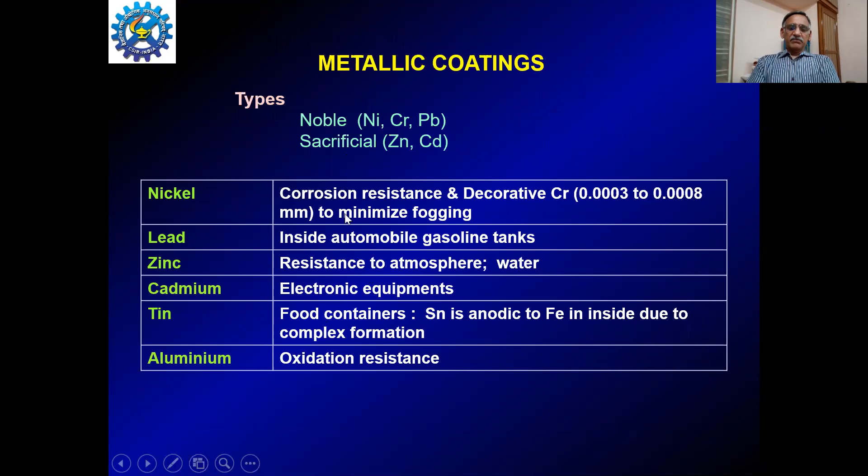In addition to that, there are certain metals, maybe a noble metal like nickel, chromium, or lead that can be coated, or sacrificial metals like zinc or cadmium can be coated, and they can have various corrosion protective applications as mentioned in this table.

The various organic or polymeric coatings which find application for corrosion control are listed here. It may be air oxidizing coating, simply solvent drying coating, latex or water thinnable coating, chemically reacting, or metal pigmented coating. Here in this type, I have given the generic type.

For example, the air oxidizing coating is the enamel. It's a well-known example which we normally use in our households. Whatever paint we are buying in the hardware shops are all enamel paints.

And here we have chlorinated rubber, acrylic copolymer, and so on. They all have solvent as a component. When applied by brush or spraying over the surface, the solvent dries or evaporates, leaving behind the three-dimensional coating matrix. Similarly, water-based coatings and other coatings are mentioned here.

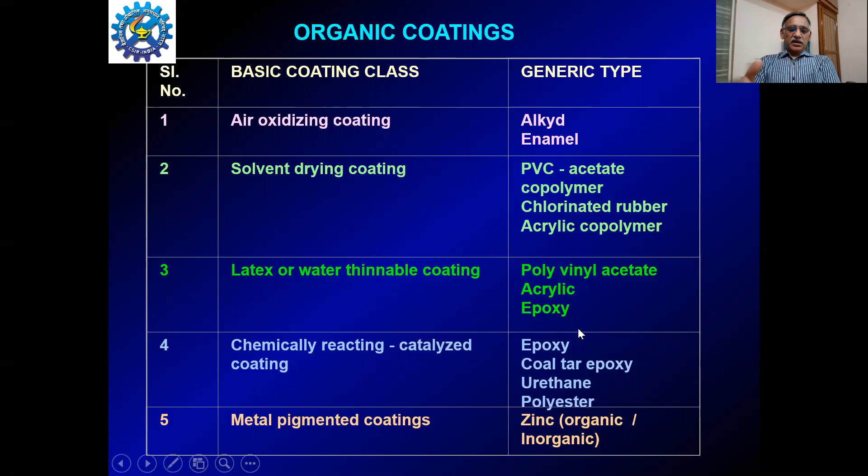While selecting a particular coating, there are numerous properties to be considered, for example abrasion resistance, flexibility, color, and gloss retention. For example, if you buy a car, we need a coating. It need not be abrasion resistant, but it should have good color and gloss retention.

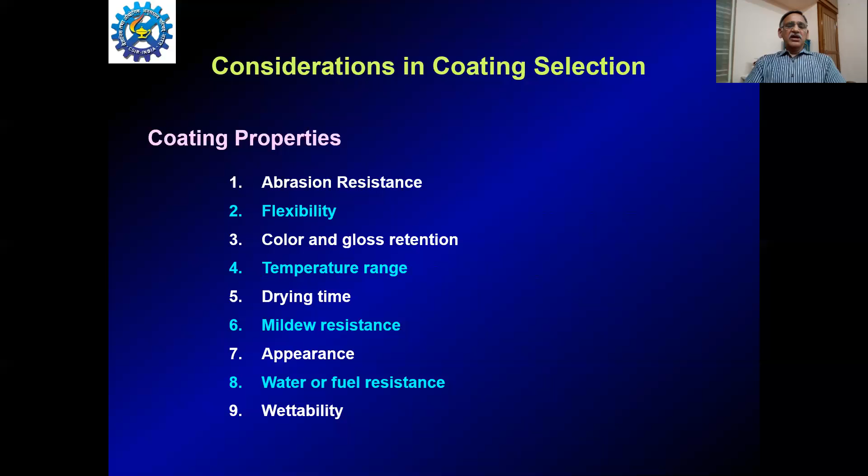Suppose if you buy a new car and within 6 months the color fades, it will lose its own value. Similarly, the temperature range, drying time, mildew resistance, appearance, and so on are all the various properties which need to be considered before selecting a particular coating.

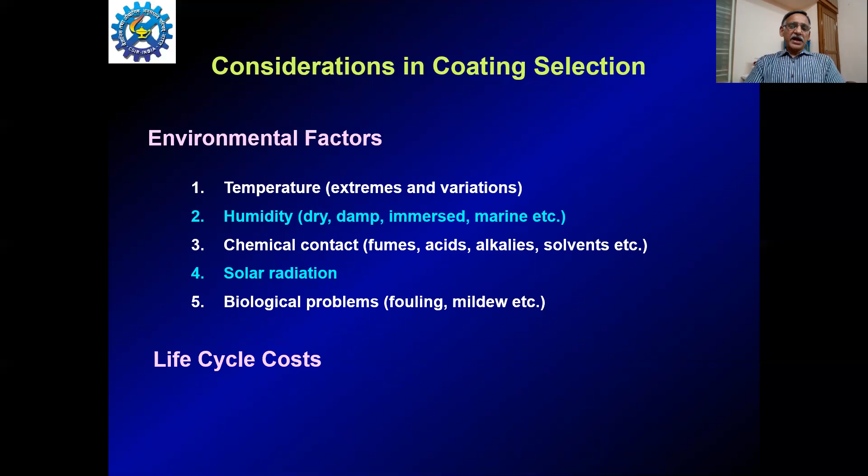Also, under different environmental factors, we have to consider the temperature while applying the paint, the humidity level, the chemical contact, solar radiation, biological species, and life cycle costs. These are all the parameters which need attention before selecting a coating.

Before winding up my lecture, just have a feel of this: if you spend 100 rupees for industrial protective coating, then 40% of that, or 40 rupees, will go for surface preparation alone. Only 19 rupees are spent on the coating material, and for application we spend the rest. This is just a cost comparison to show how much we are spending towards coatings.

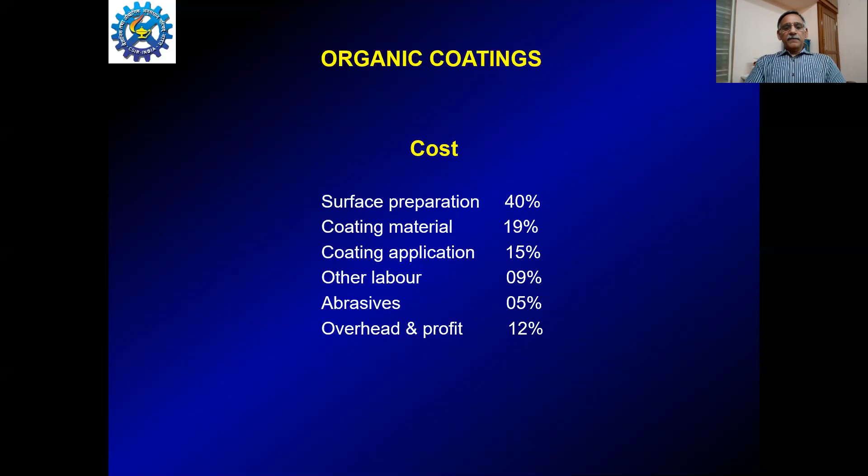I think I have given a very exhaustive look into the corrosion aspects, starting from the definition of corrosion. I have explained the various complementary reactions involved by showing an image combining zinc and platinum, and shown that corrosion consists of two complementary reactions: anodic reaction and cathodic reaction. Also, I have shown the various wet and dry classifications.

Slowly, I have explained the various parameters or factors which influence metallic corrosion, whether atmospheric, immersed, or underground corrosion. And I have taken a small tour into the thermodynamic aspects of corrosion, namely by explaining the standard EMF series and its merits and demerits.

Then we discussed something about the galvanic series, its merits and demerits. Then finally, I have explained the Pourbaix diagram and its applications in predicting and interpreting corrosion.

I have also given a flavor of various forms of corrosion by showing small pictures of the various forms of corrosion, and mentioned the units of corrosion and the various ways of corrosion rate determination, like electrochemical or non-electrochemical methods, and so on and so forth.